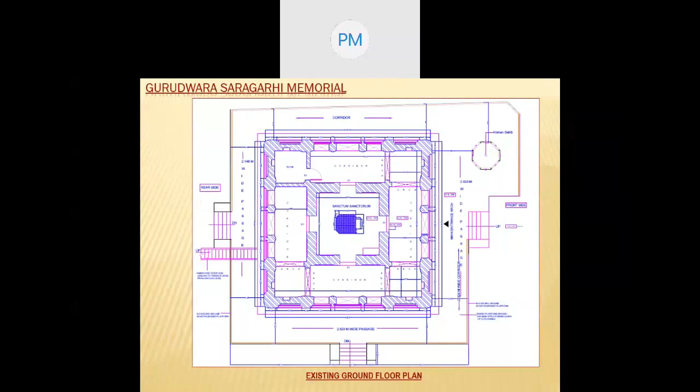Amritsar is quite closely built. There are a lot of structures adjoining each other, so we cannot move very freely. Even the lanes in the old town are not wider than 10 to 12 feet, so even if two cycle rickshaws have to move, it becomes very tight.

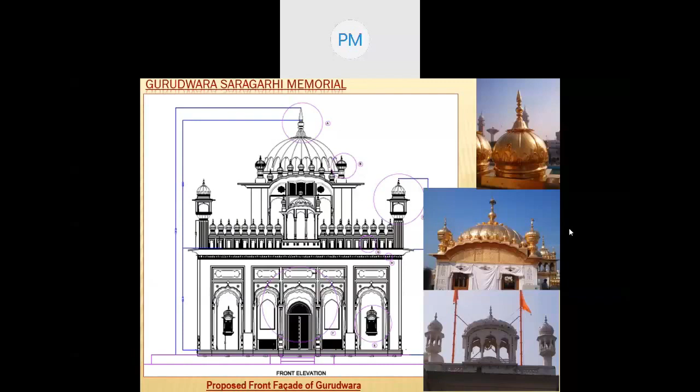Here you see, initially I showed you the floor plan. Entire facades, all facades, along with their damages were recorded by means of interventions. Each and every art form was documented. This became a wonderful documentation for the entire government department in the state, wherein even if a particular part falls due to unforeseen circumstances—if there are 4 minars and we have one existing and they are documented properly with dimensions—we can always redo that and revive that particular area. So like this, all architectural features of Gurudwara Saragarhi were documented.

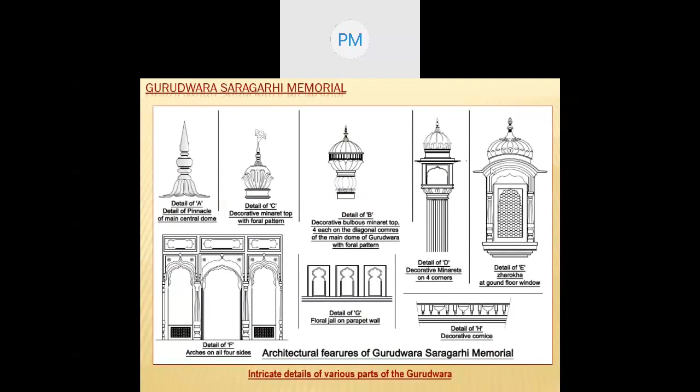These are various areas which you can see. Now you can relate the photograph and the drawing together. The interventions were listed. Each and every minute area where there were damages, may it be popping and peeling of plaster, damage in the stone jali which was in Red Agra sandstone, or a small portion of a minaret or a gumbad fallen down—everything was documented.

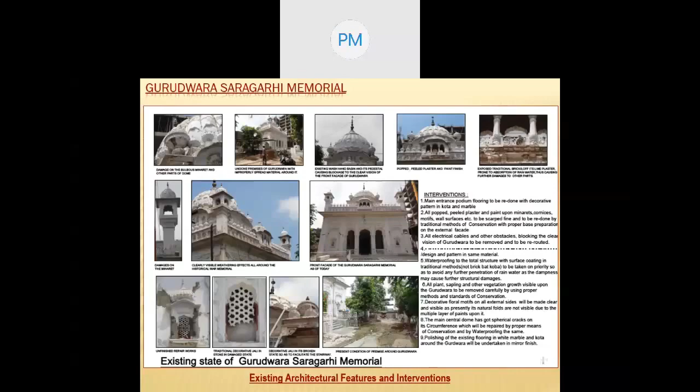Here we faced a lot of difficulty while working, because there are 10 parab in the Sikh community, and whenever there's a parab, you have a lot of bulbs and lightings illuminated on top. So we cannot walk with shoes or sandals on the rooftop, it being a holy shrine, and this had a sanctum sanctorum in the middle. So we always had to face a lot of difficulties, harsh sun, and the team was very small. It had one CAD support and support staff and myself initially, but we always had engineering team supporting us for estimations. Initially the takeoff sheets were prepared by us.

Moving ahead to the later sites, initially after Gurudwara Saragarhi, we had Kila Ahluwalia. Kila Ahluwalia is an ancient township with 3 to 4 floors of buildings above each other, just like the modern township we see today. It is mostly crowded by cloth traders on that side, but we did not get NOC from Kila Ahluwalia.

So then we moved ahead to Udaseen Ashram Akhara Chitta. This was a mutt administering it, and Chitta Akhara had its own mahant. Every time we used to start working on each and every pause point. A heritage site on which we are working is defined as a pause point where a tourist takes a pause.

Further, as we move ahead, we experience that every pause point undertaken in the project is highlighted in a manner that on the road there is a marking, so that the walker-by or the tourist learns that yes, this is the place where I have to stop and see on my left or right. Tourist guides are there, but in the daytime, when the city is crowded and the inner lanes are full of traders and people moving around, a tourist loves to walk on his own.

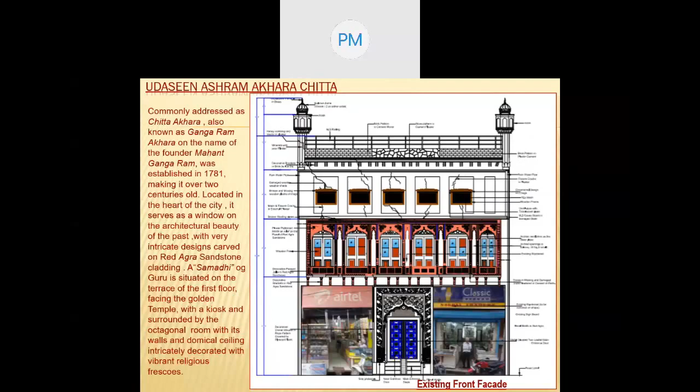Now here you see in the initial photograph, signboards like Airtel and classic watches on the right. After that, these were removed, and we defined the marked rectangles with a specified signage and signboard which was specially designed for the entire trail.

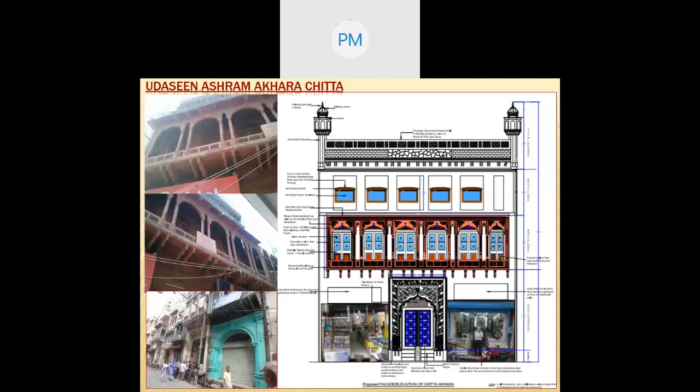This is the main entrance. Now you can compare the left-hand side photograph with the right-hand side drawing which is prepared. Nothing here is rastered. Everything was taken and physically measured.

We had takeoff sheets because when you prepare the estimate, you cannot hypothesize the measurements. You have to go in detail, because when the contractor bids for the project, he requires each and every measurement. The benefit of doing proper documentation before the project is that when the contractor starts working and his bills start getting presented, you already have all the measurements and takeoff sheets in hand.

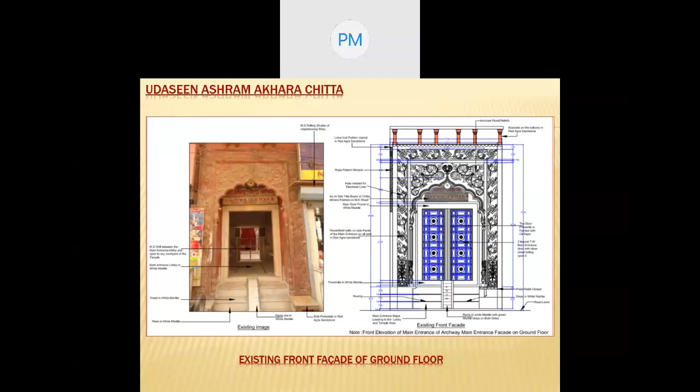Unlike routine buildings where we know from the initial day what all is going to be constructed, here there are some unforeseen areas which crop in. For example, there is pop and peel plaster, and we just try to knock and remove it. But when you remove that, you learn that there was a window which has been closed in later times. So you have to take that window and start working on that as well.

You cannot leave that. Now in this image, you see the brown marked areas. They were all closed by wooden panels, wherein the blue ones are glazed panes. Later on, all these glass panes were closed with plywood, because in the recent past some glasses got damaged. So it was redone with the same thickness of glass. Everything has to be in the original form.

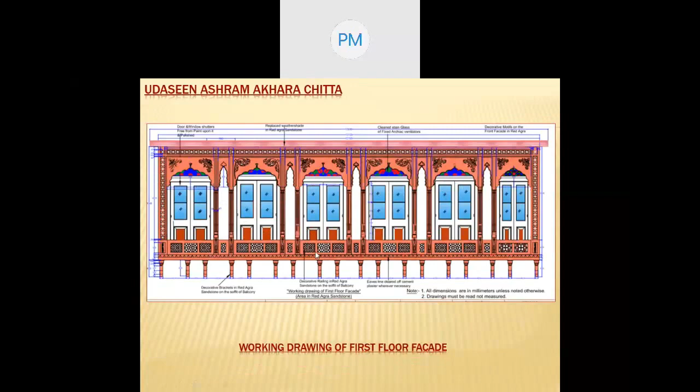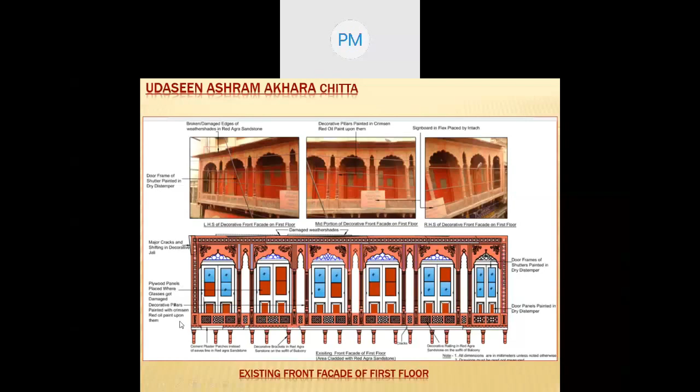Working in the similar manner, fresco art, the glazed tiles, everything was brought in. The jali which was damaged in various parts was redone. In the existing drawing, we have to mention which areas have what problems. For example, if some ornate part is damaged, or some corner of red Agra sandstone cladding is not in existence, we have to redo that in the same form.

Now, moving ahead, you see here all these particular doors which were documented and worked upon. Each and every area has been measured. Even the top door frame, you can see the curvy part has been measured. You cannot drop a single offset of a door frame. Every frame needs to be worked upon.

For example, when the person starts working, the contractor especially will have to record each and every dimension. Any measurement below 0.3 meters, that is 1 foot, will be measured in running meters. Anything above that will be measured in square meters. That is a simple thumb rule, practiced locally even when you execute your own private projects.

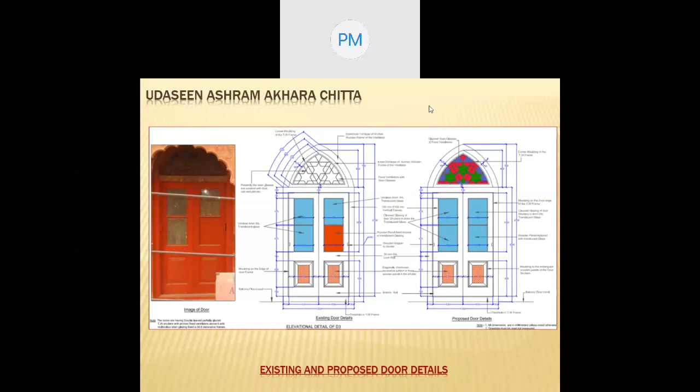Similarly, the estimate was prepared. For items which didn't have proper records in the document, the rates are set by government. First, we follow that particular district's rate. Provided we don't get rates of particular items in that district's schedule of rates, that is DSR, we have to move to adjoining districts.

Even if we don't find details in adjoining districts or the state, we have to move further with details and rates available in the adjoining states. Now, even if it is not available in the adjoining states' DSR, then we have to prepare our own rate analysis, for which we have to go to the traders, the private contract suppliers, contractors. We have to take the actual rates and start preparing each and every rate on our own. Then only we'll reach the price, and accordingly the estimate is prepared.

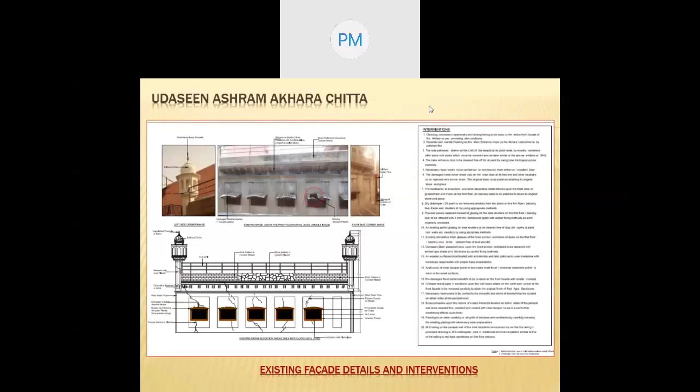The tenders are floated, and contractors who are aspirant for the project bid for it. Proper analysis is done, the project is awarded, and it moves forward. This is the basic methodology of how a project is developed, further tendered, and given order to the contractor to move further.

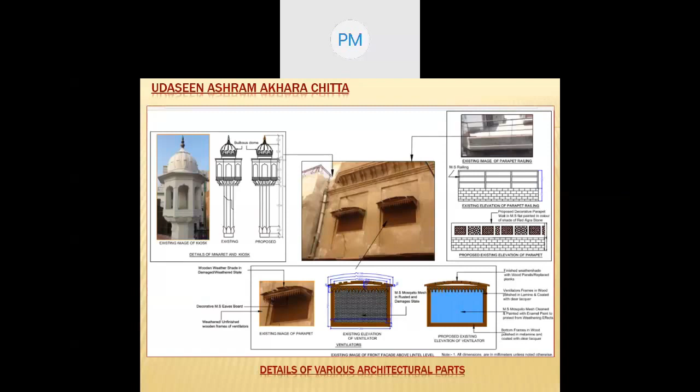This Chitta Akhara had some ventilators on top which were damaged, with its wooden tops. Like here you see, just like the Chhajja we have in recent times in RCC, there were wooden panels fixed together to complete the profile of the area. These are the jali representing that particular area. Above the drawing, we have put images so that it can be related.

Now, all this document was to go further to PMC. We represented design and supervision consultants. Now, as a DSC expert, my task was to develop the project and get the details prepared properly. The entire DPR was prepared by our team, and further it was submitted to the project management consultants.

There is a layer of an equal number of people on that side, maybe even a little less. They will do scrutiny of the entire submission we have made. If there is any lacuna or shortfall, they'll revert it back through a letter, and we have to attend to those areas. There will possibly be some joint visits which we conduct, and then the project is frozen and tendered.

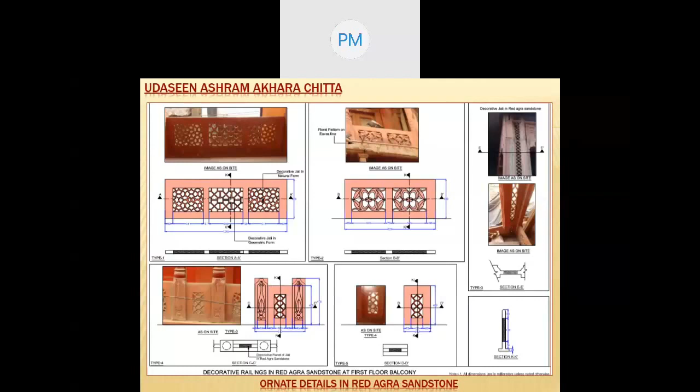So here you see the way the details were prepared: each and every area, a small pillar, a floral relief, jali.

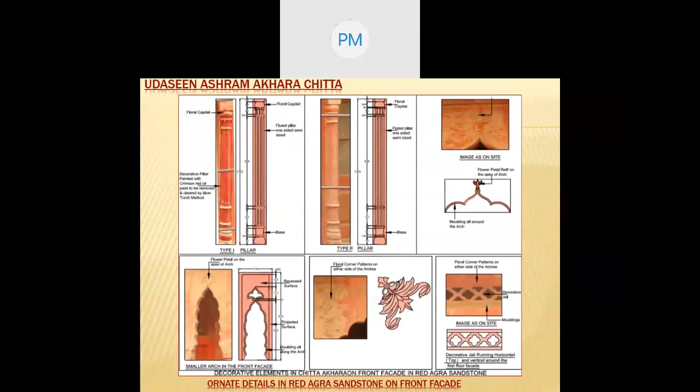We didn't have any total station, we didn't have any laser scanning methods to work with, it was even not a distometer. So it was just measured by physical meters. All the manually written takeoff sheets were preserved and kept very safe in the office, and shared amongst all so that work doesn't get held up.

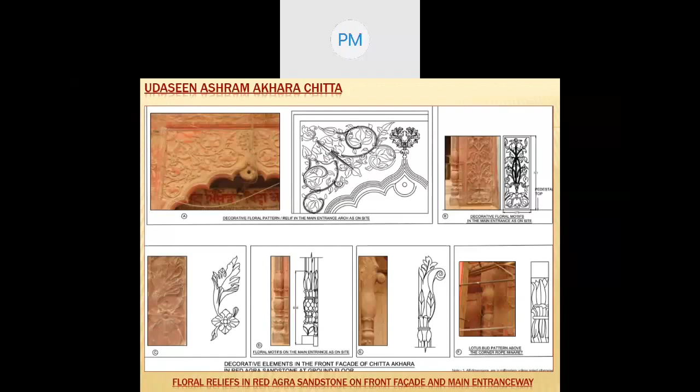Now this is another site, another pause point coming ahead: the Thakurdwara Darianamal temple. Thakurji is Lord Krishna's babyhood form, and that's how this temple was Lord Krishna's temple. Thakur Dwara Darianamal was a renowned person in that region, a renowned trader. Amritsar is a busy city full of trade, especially in textiles and even other spices and all.

Moving further here, this area which you see on the left and right of the dry distemper paint, you can see some areas have popped out. Behind that, you can see the fresco art, and even on the door they just painted enamel paint in brown, because every time there is some festive season, they have to otherwise maintain it. This door was fairly fine on top and in good condition, but the bottom was in a deteriorated state, so the particular section of the door which was damaged was removed and redone.

Now further to this, as you saw in the poster of mine, you could see some cable lines moving through every part, crisscrossing. Here, even in the middle photograph, you can see the cables going, and it was creating a very shabby impression to the tourists, visitors, and even the pilgrims who used to move ahead.

Now, when you go to Golden Temple, mainly you enter from Hall Gate, then you go to Town Hall, you reach Phuwara Chowk, and straight away you go to Golden Temple. That is a routine stretch which recently has been developed under a different project. It was not this particular head of project, so that was not executed by me.

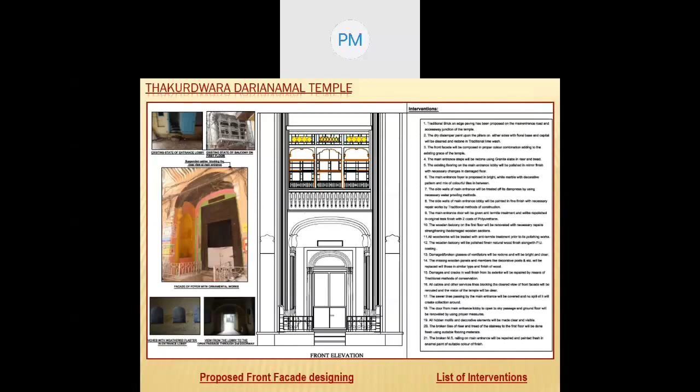My region was from Phuwara Chowk, after Town Hall, Gurdwara Saragarhi, Kila Ahluwalia, you take a right turn, you reach Katra Ahluwalia. And further here you can see the way the electric poles, cables and all were haphazardly running. So this entire cable was later laid through underfloor trunking.

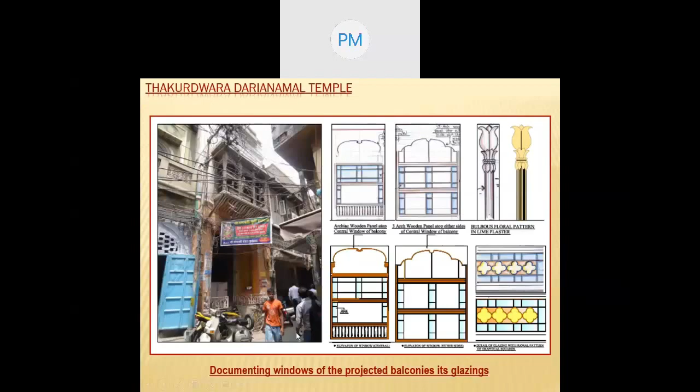So we had an electrical engineer in our team, a civil estimator with us, and environmental experts who were there with us. In some sites, we could find there are some trees and plants. If, due to any reason, even if a person plants something, we cannot just uproot it. There is a proper methodology in which the environmental expert documents that particular site. He is a part of our team.

He will learn what is the foliage of the plant, what is the girth of the root, the tree, the stem. After writing each and every detail and the reasoning, only then that particular plant vegetation growth will be removed. That is under his responsibility.

Then there are environmental, social safeguard specialists and community development officers, CDOs. Their task is to interact with the locals.

For example, if you go to this particular temple of Thakurdwara Darianamal, the temple authorities, mostly the Darianamal Temple Trust Authority, may initially hesitate to give NOC for a government or different sector office to execute work through their funds on their building. So we have to pursue regular meetings with them.

We have to go with our team leader, our experts, our staff. We'll explain the project, why it is necessary, what are our aims and objectives, how they will get benefited, how tourists will get a pleasant view, and how the city will portray in a better manner to the pilgrims, tourists, and the natives of that particular region.

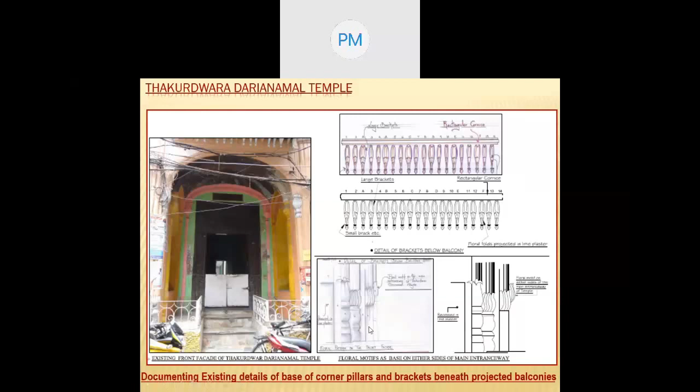Now, as I said, we were especially working on the facade. Initially we didn't go in, but while working on the facade, like this front line, if there are some wooden timbers from the back room coming and projecting into the wall, and we need to attend that region, then even that area is taken up.

Once I enter from the main door, the floor was damaged. So having some ornate pattern, we prepared this existing drawing which has got all the measurements with niches and every small area measured. Then the floor area, the design, what we proposed.

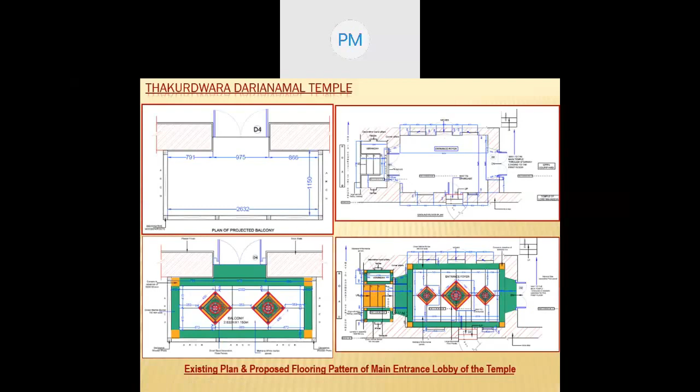The green ones are green marble, the Jaisalmer, and Red Agra sandstone, which can be polished. You know very well that granite cannot be polished with a hand polishing machine very easily - it has to be pre-polished in the mill and then it comes. So here we took materials which could be polished properly there and then itself.

Moving ahead, the first floor also was taken in. This is the Sanctum Sanctorum - you have to climb steps up and you reach this floor. The floor plan - moving ahead, this is the terrace floor plan, which had various small shikharas in between.

And a massive shikhar in between. The height of the shikhar was nothing less than 25 feet. It was very difficult for us to measure - we didn't have that tall ladders, but due to the support of temple authorities and staff, we could always do it.

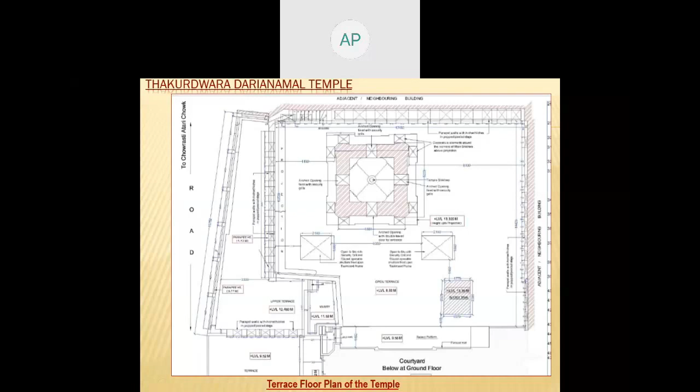They had to be removed by a torch method, a blowtorch method, wherein a flame is prepared, just like you do welding. You have to flame it out, and with thick cotton you have to wipe that particular area so as not to damage the inner original form, and only to allow the upper layer to come away.

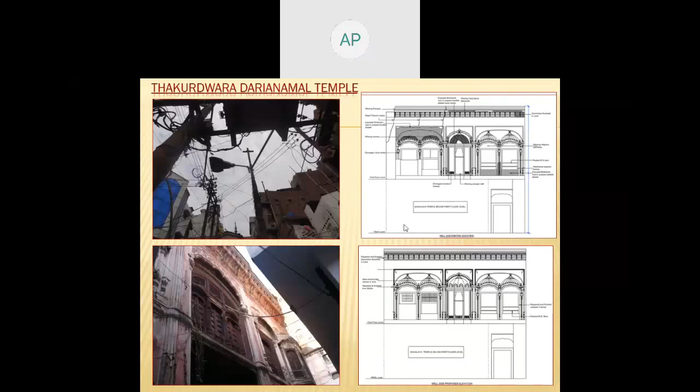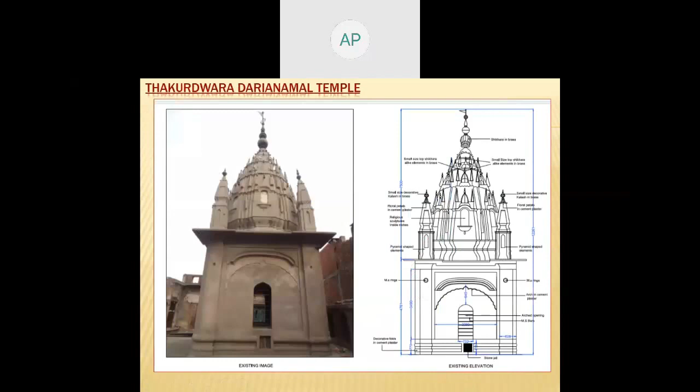Here, the upper floor, the shikhar which I mentioned, was very tall for us to work upon. The electrical layouts were prepared for all floors.

Now the basic approach of the project is understood, how it was taken. Different illumination lights were laid in a manner that once you illuminate the corners, the light gives you shades and shadows, which is very important to highlight that particular site.

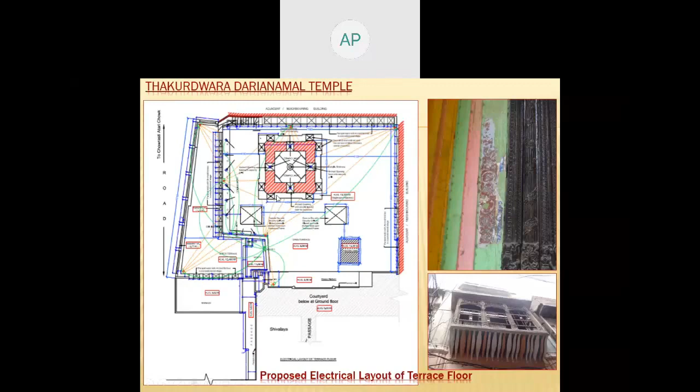Though it was a private building, it was undertaken because in the project, when a tourist moves ahead in his heritage walk, we have to make the project interesting. That site requires breaks in between, and the tourist guides taking them allow the tourists to enjoy local delicacies like malpua, jalebi, and other native dishes.

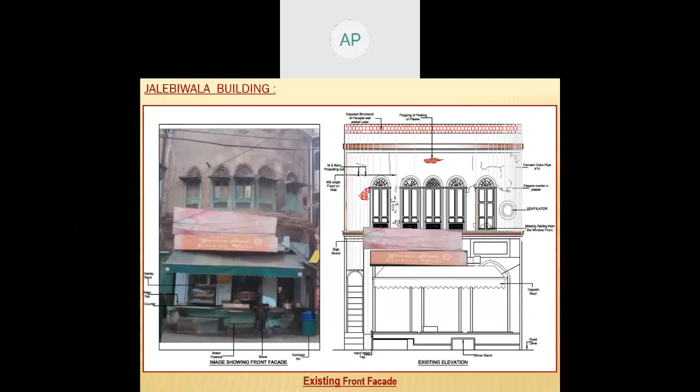After we documented this site with its facade, the measurements were taken in detail. The road was measured, even the chowk was developed. The chowk had nearly 4 roads accessing from that particular junction.

So whenever we work, some elements are visible and evident all across the city. We have to make it possible to define certain areas like brackets and some missing elements which don't have any references.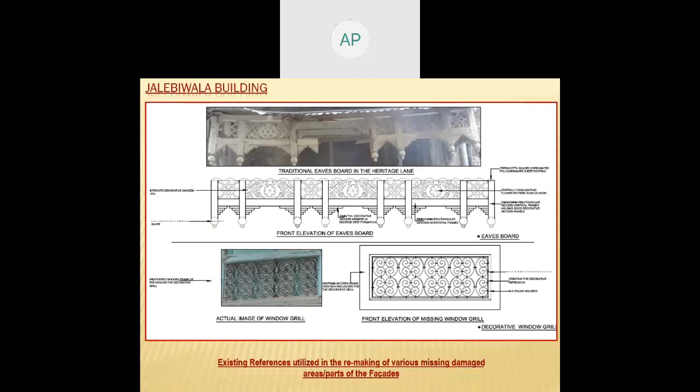Sometimes we reach out to the owners, asking them to go back to their previous photographs and memories where they have some record, and we take references from that. But sometimes it's not visible and not available. At times we have to take references from the adjoining buildings, so there were some 4 to 5 profiles which we defined.

This is a window of Jalebiwala building, but here I'm showing you only one building, one window, whereas each and every window was measured in a similar manner.

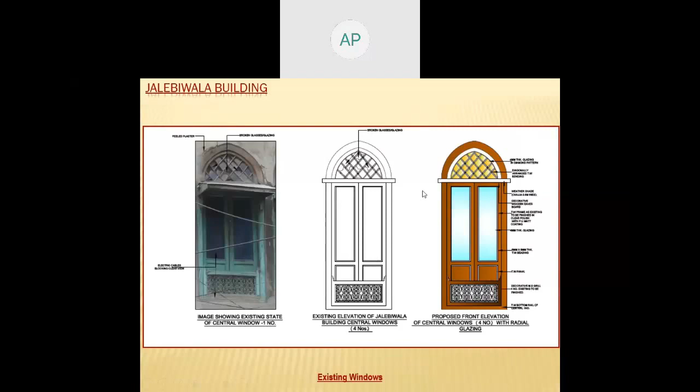They were documented on the wooden frames where there are termite-like effects on the wood, and they have got damaged by the course of time due to climatic effects. We had to redo them. Sometimes the wooden sections, only those which are damaged, were removed, and proper base coating done, anti-termite treatment done, various layers of coatings done so as to preserve them from climatic damages and changes. You can see the damaged glasses which were redone. All this, each and every piece of the work needs to be recorded because your estimation should go accordingly.

This is Gurudwara Chowrasti Atari, built by the 6th Guru, Guru Har Gobind Sahib Ji. Sitting on this particular Gurudwara, he could manage the 32 Hatiya. There are a number of shops near Golden Temple, the old trade shops, and he used to administer the further development works of Golden Temple.

This is again Gurudwara Chowrasti Atari. Atari means chowk. Here you can see our team measuring it physically, and as it gets crowded in the daytime, we have to go early morning. We start somewhere at 5 a.m., 5:30 a.m. With early sunrise, we have to start working.

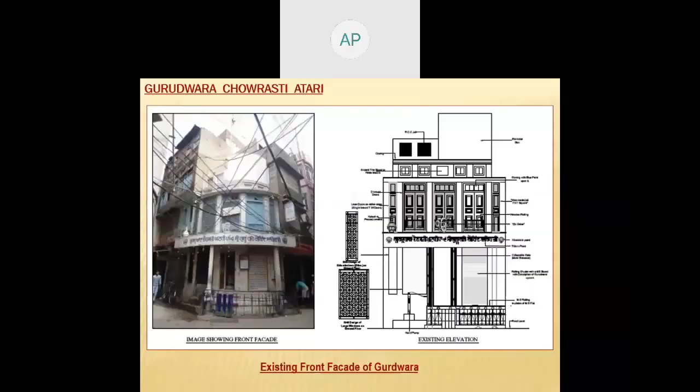After getting done with the drawings and proposal drawings, we had to reach with all these drawings to the SGPC office and meet the Pradhan of SGPC, Shiromani Gurudwara Prabandhak Committee. Unless and until they give their NOC, we cannot really work on them. Though the funding is done by Punjab Heritage and Tourism Promotion Board, through the other funds reaching to them, we cannot move further unless and until we have the NOC.

Here you can see this was how the Gurudwara used to look, and the top areas were later developed civil structures. These were later built. Some forms were there and some areas were missing. So we tried to enhance it by putting a steel dome on top. Though here you see it as full dome, but from rear end, 1/4 part of it is a cavity. If in case some maintenance is required to the fabricated structure, then in that case we can access through that.

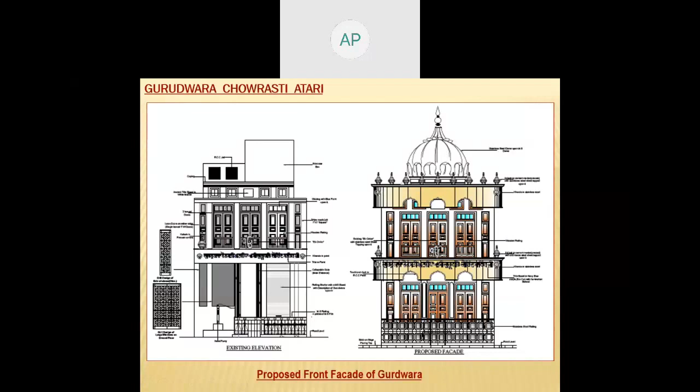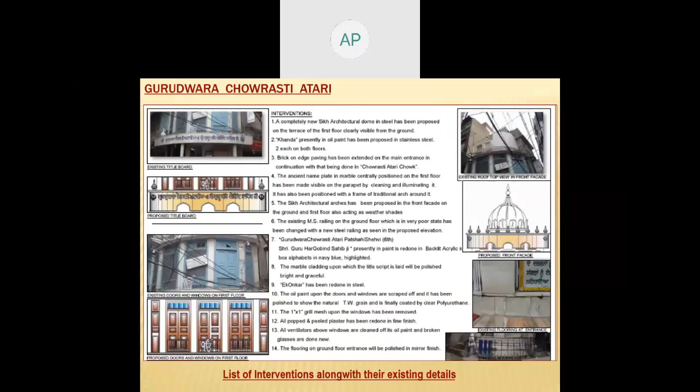Multi-foliaged arches, anti-termite treatment, Belgium glass, various brass works were all introduced for the project. There are some areas wherein you can see a plaque mentioning the period of construction and the name of that particular site, which was mostly written in Gurmukhi, the native script.

Then we move to Udaseen Ashram Akhara Sangalwala. This is built by, the Akhada represents Baba Sri Chand Ji, who was son of Nanak Dev Ji, but he followed the Hindu faith. It has around 2 to 3 floors, 3 floors beneath this ground level, the road level.

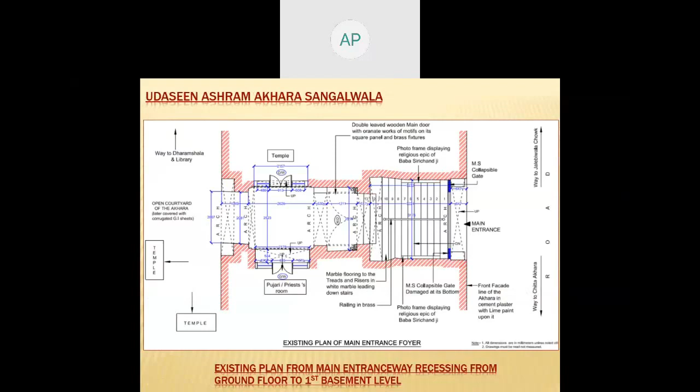Again, we have to reach the Mahant of that particular Akhada. The entrance area was documented, each and every step, damages, needs and necessities of that particular Akhada. We have to interact with them. Sometimes they give us points.

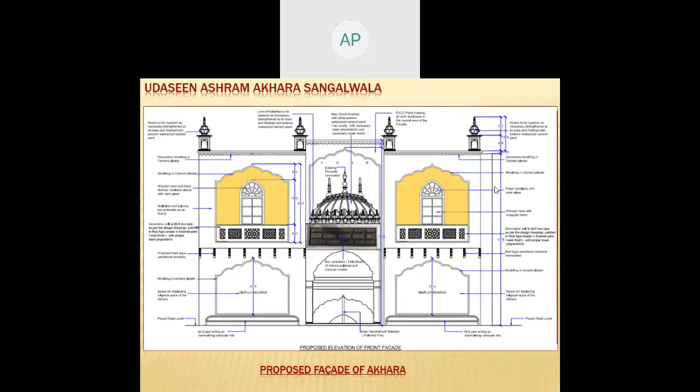Here you see that this area was built with a room. Here you can see one profile, but here the wooden window is rectangular. Some minars were damaged, the kiosks. Then we took up this profile and developed the facade in this manner. You can compare them. Though it is the line work now, it has to be self-explanatory when it goes to the tender document, all the drawings have to be submitted in a readable form.

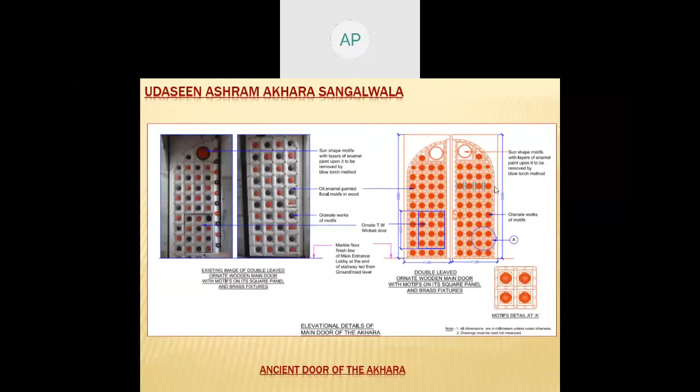Each and every entrance door, Sangalwala - Sangal is chain. It was a brass chain. Udaseen Ashram Akhara Sangalwala, Sangal is chain. You access from the ground floor to the lower floor, basement floor.

Every area has to be checked if any part is missing, damaged, replaced later on, or modified. They have to be redone in the original form. References are all available there, we just have to replicate them.

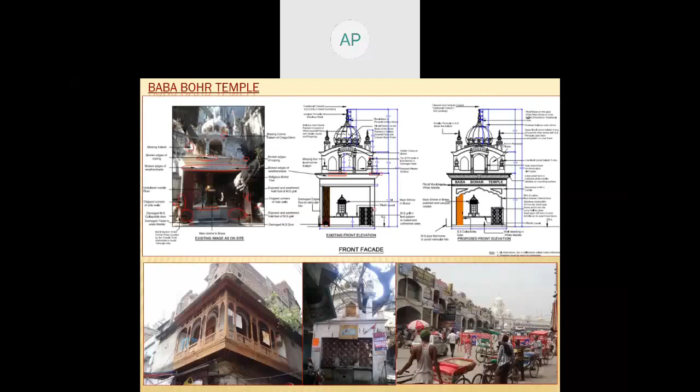Here you see the inner part from where you have to reach the ground floor. On the lower left, you can see a man sitting on top of the roof doing some maintenance work. Now that's how the branches go from all corners.

In their own manner, whatever best knowledge they had, they painted it in enamel paint in white. Every festive time, you can see some illuminations hung, with cables running around. So we defined specific areas for them on how to hang their illumination. Otherwise the routine practice was it was nailed here and there without even learning whether it should be done or not, because the person executing the task is not that alert or sensitive to avoid it.

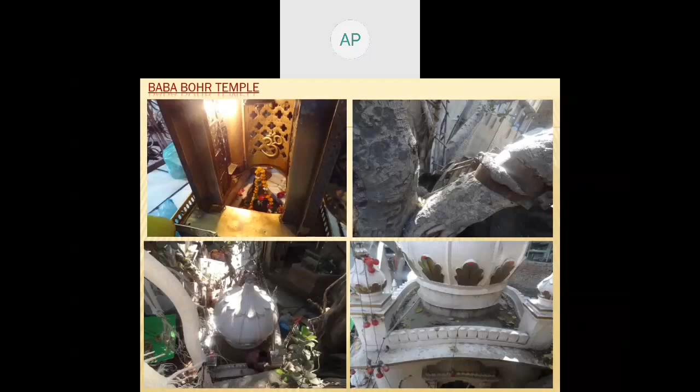On the top right image, you can see how the branches are clamped. This is worth visiting, though it's a very small shrine. You can see various art forms here, including the Pinjra work which we saw initially.

It's important to know why these stretches are important. There is a stretch by the name Crawling Street. In April 1919, there was a situation wherein the British were flogging Indians who used to move from that particular stretch, which was defined for 180 meters.

Most of the time, whatever situation comes for our national security, the first and foremost insecurity is faced by the native people placed on the borders of adjoining countries. Like now with Pakistan on the border of Punjab and Rajasthan, these are the states that face the toughest situation first. They all have to live their lives with great care, and threat is always around them. Any small distress at the national level also affects their lifestyle.